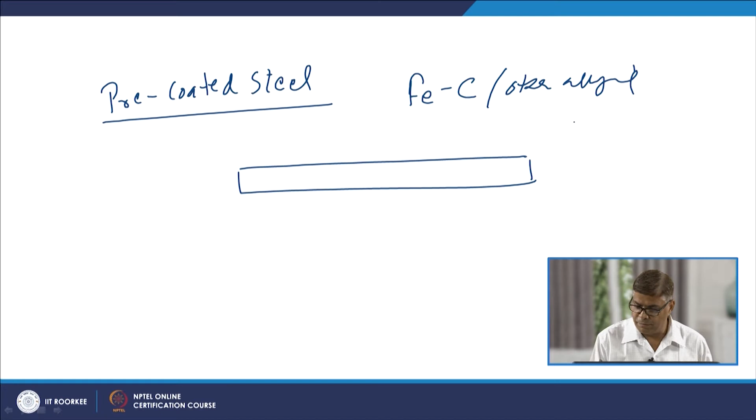Steel is an alloy of iron and carbon with the presence of other alloying elements. These steels are not very good with regard to resistance to environmental exposure in the form of oxidation and corrosion. Except the stainless steels, most steels have primarily iron, carbon and other alloying elements for strengthening purposes. Such steels do not offer very good resistance to oxidation and corrosion.

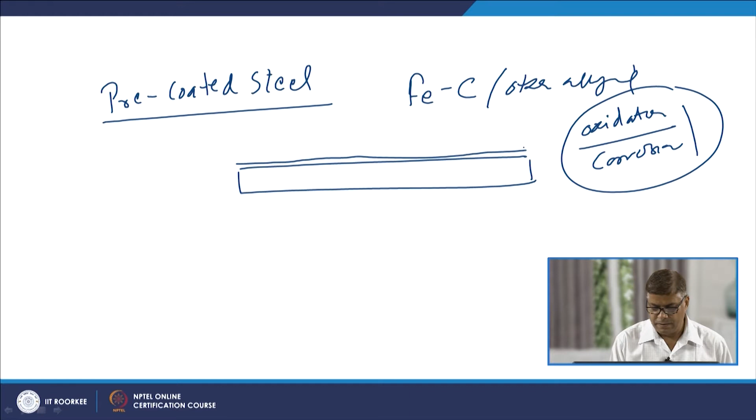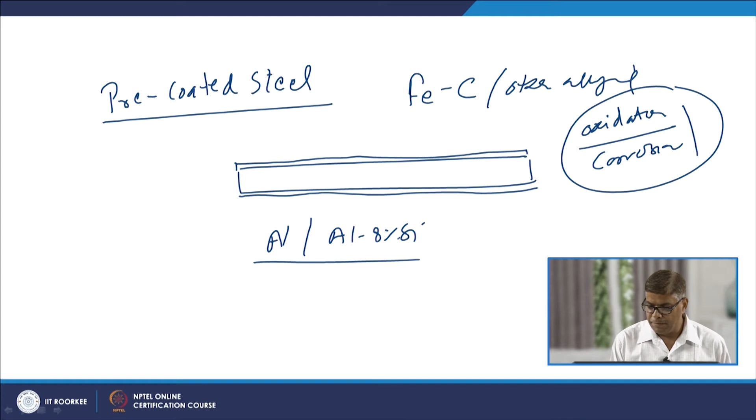Therefore, in order to improve their resistance to oxidation and corrosion, the steels are frequently coated with metals which can offer such resistance. When a coating of either pure aluminum or aluminum 8% silicon alloy is made on the steel, it is called aluminized steel. On the other hand, we can also do the coating of zinc. When zinc is coated onto the surface of the steel, it is called galvanized steel.

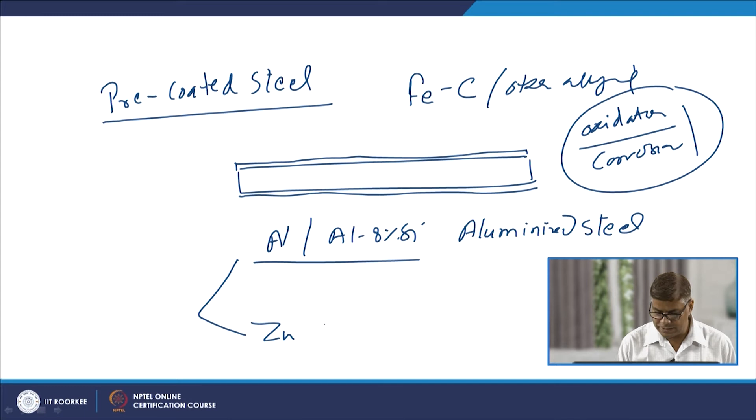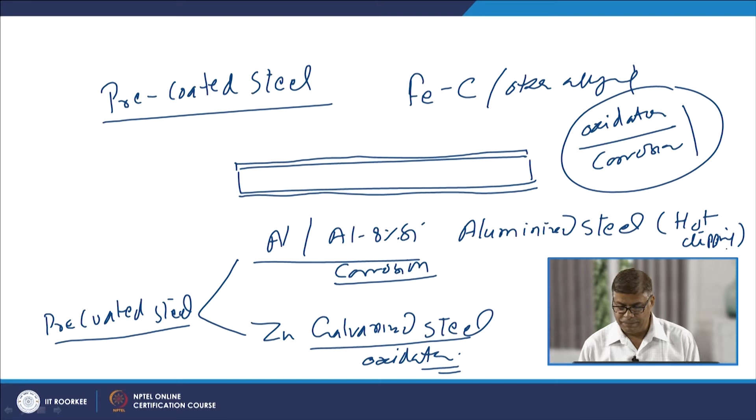So, the aluminized steels offer very good resistance to corrosion, while resistance to oxidation is offered by the galvanized steel. These are the two broad categories of pre-coated steels. There are different methods of applying these coatings, but the most commonly used method is hot dipping. The plate, sheet or component to be coated is dipped in the molten bath of aluminum or zinc and then taken out to develop the coating.

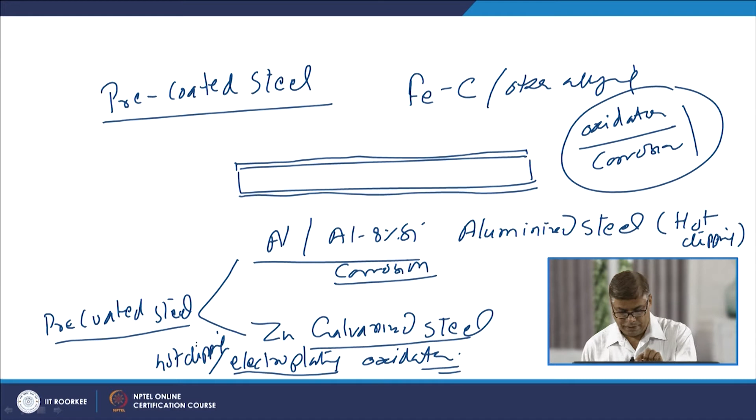Another method is electroplating. Electroplating and hot dipping are both used for developing galvanized steel, or applying the coating of zinc onto the surface of steel. When these steels are welded, like this is one component and this is another component, say these are coated steels, the surface will have a coating of either aluminum or zinc.

For welding, when the faying surfaces of such steel sheets are fused, the zinc and aluminum will also be heated and brought to the molten state. When the melting of aluminum and zinc takes place, this interferes with the welding in different ways. This interference due to heating and the molten state leads to a reduction in the weldability of these steels.

So, in general if we compare carbon steel with and without coating, the coated steels will have somewhat lower weldability than the uncoated or bare carbon steel sheet. So, what are the ways by which the aluminum or zinc coating can interfere in welding so as to reduce weldability? These are three different ways.

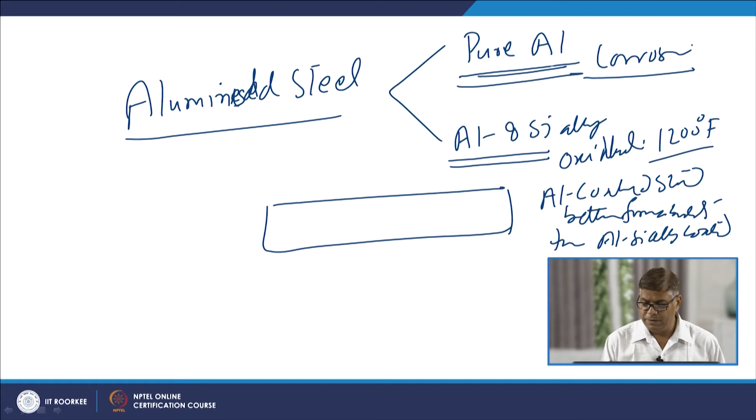So, the high temperature oxidation resistance is improved, but if we compare the steel sheets coated with pure aluminum and the aluminum silicon alloy, the aluminum coated steels show better formability than the aluminum silicon alloy coated steels. So, this is one comparison as far as pure aluminum and aluminum silicon alloy coated steel is concerned.

Now, aluminized steels can be welded using the resistance welding processes, like spot welding or seam welding. As far as the weldability of the coated steel by resistance welding is concerned, it is similar to that of bare low carbon steels. The coated steels offer similar weldability, but there are some issues. To understand those issues, we need to understand a little bit about the resistance welding process.

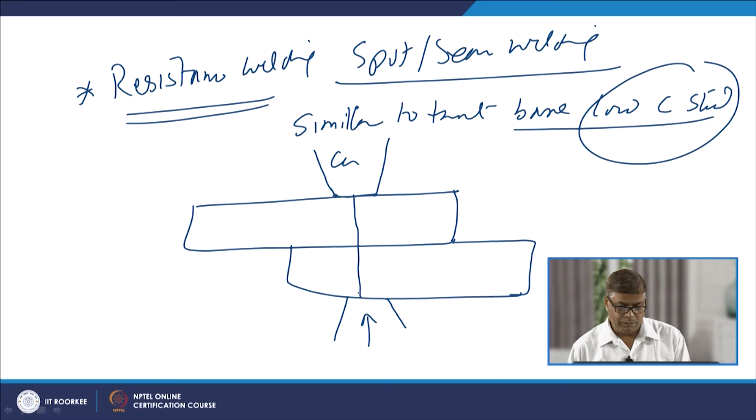In the resistance welding process, water cooled copper electrodes are brought in contact with the surface and used to apply pressure, and once the sheets to be joined are in contact, the current is allowed to flow from one side to another. This current generates heat by the I square R T principle. Since the contact resistance is maximum at the interface, maximum heat is generated there, leading to softening and partial melting of the sheets to develop the nugget and ensure metallurgical continuity between the parts to be joined.

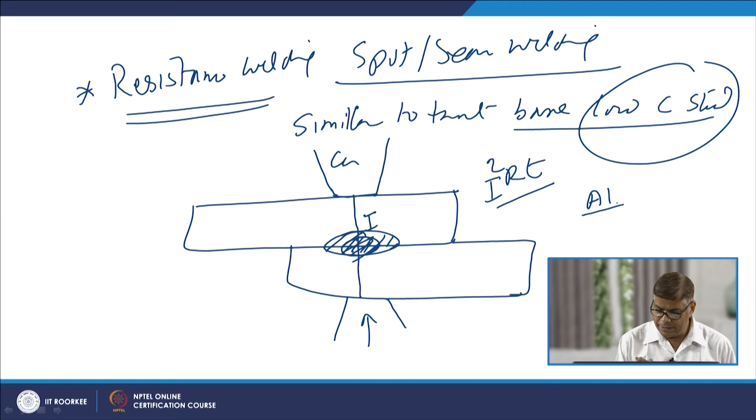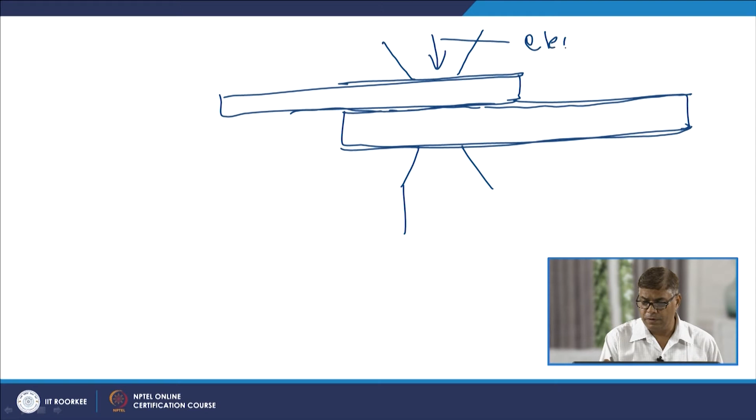Now, coming to the aluminized steels, the aluminum coating is there on both sides. Say this is a sheet coated with a thin layer of aluminum on both sides, and likewise another sheet is also coated with aluminum. So, this thin layer of aluminum will be at the interface, and both sides will have electrodes used to apply the electrode force. Then the current will flow across the sheets to be joined, generating heat through the I square R T principle.

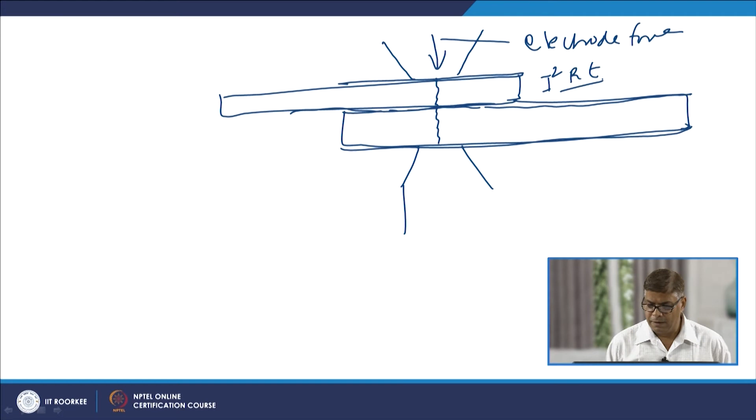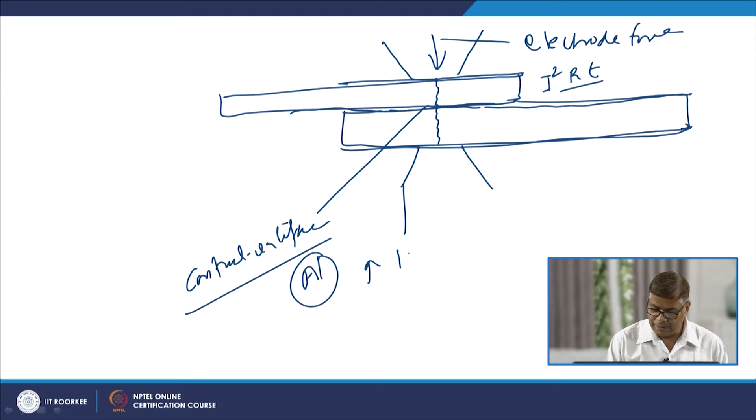But in this case, at the contact interface on both sides we have aluminum, which has higher thermal conductivity and high electrical conductivity, which means electrical resistance is low. So if we compare with bare sheets with no aluminum coating, in aluminized steels the R value at the interface will be low, and that is why under identical current and time values, the heat generated will be lower because of the lower resistance.

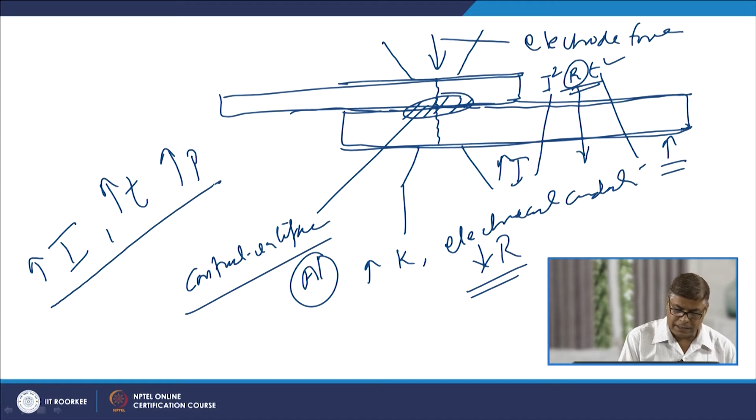Therefore, in order to generate sufficient heat at the interface for the softening and partial melting required to form the nugget, to counter the reduction in R, we need to increase the current and the weld time. So, in general, the welding current, the time for which current flows, and the electrode pressure used to hold the sheets together are all increased, so that the required heat for softening and partial melting can be facilitated.

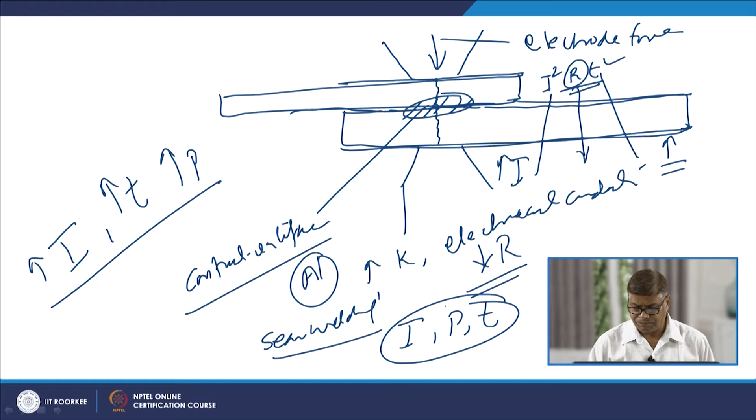Likewise, in the seam welding of aluminized steels, the current, the pressure, and the time for which current is allowed to flow are all increased, so that the required heat can be generated to produce sufficient nugget size as well as thermal softening of the metal.

Coming to the arc welding of the aluminized steels.

Arc welding of the aluminized steels may be carried out using the shielded metal arc welding process. It can also be carried out using the gas metal arc welding process or the gas tungsten arc welding process. At the same time, things can also be joined using the soldering processes.

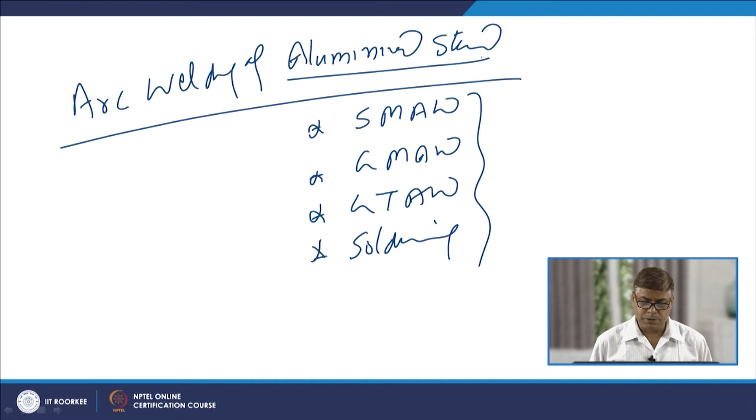But the kind of issues related with these processes when the aluminized steel is welded are different. So, we will be talking one by one about each of these processes when they are used for welding of the aluminized steels.

When the shielded metal arc welding process is used, we know that the protection of the weld pool from the atmospheric gases is very less. The protection of the molten pool in case of the SMAW process is poor, because whatever inactive gases are produced, they are produced through the thermal decomposition of the coatings available in the flux, and they provide a loose shroud of inactive protecting gases around the arc as well as the molten pool, and therefore protection is poor.

So, in order to provide effective protection, basic coated electrodes are used for the welding of the aluminized steels by the SMAW process. But the effectiveness of the shielding of the weld metal from atmospheric gases like oxygen and nitrogen is very poor.

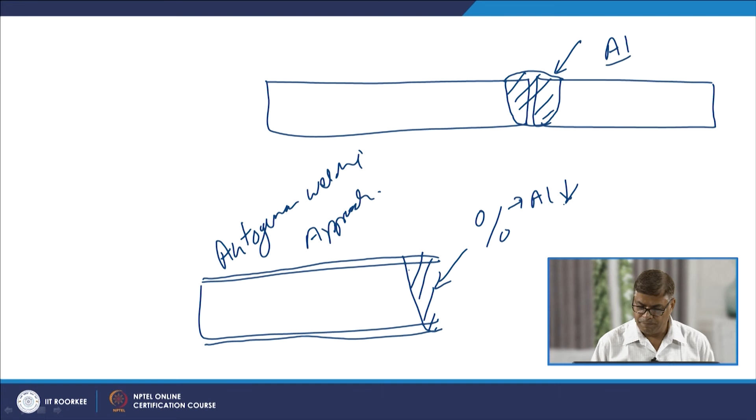Now, we need to see one very simple thing. Aluminum coating of a particular thickness is being used, and when we melt a portion, the aluminum will be going into the weld metal. When we use a thick sheet, the percentage of aluminum in the weld metal is low as compared to the case when an aluminum coated thin sheet is welded, where the proportion of aluminum going into the weld metal is much more.

So, when thin aluminized steel sheets are welded, in general the aluminum concentration in the weld metal is high as compared to the case when aluminized steel sheets of greater thicknesses are welded by an autogenous welding process. Then the aluminum concentration in the weld metal is less.

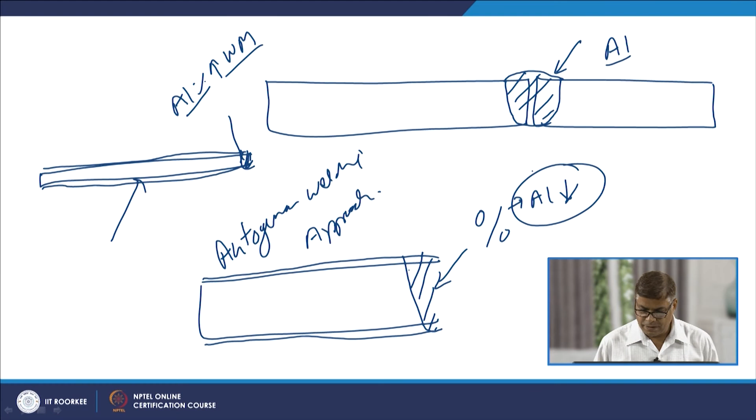With a higher concentration of aluminum, greater than 1% in the weld metal, since aluminum does not dissolve in the iron, it forms brittle iron-aluminum intermetallic compounds. The formation of these brittle intermetallic compounds reduces the ductility, the strength, and the formability of the welded sheets. So, we need to look into how much aluminum is getting into the weld metal, especially in the case of autogenous welds.

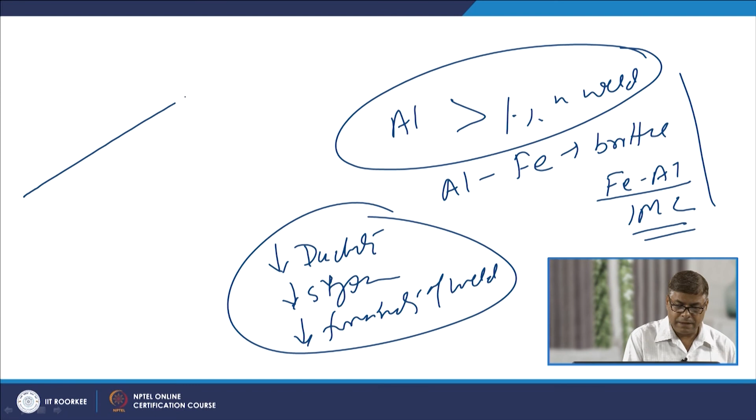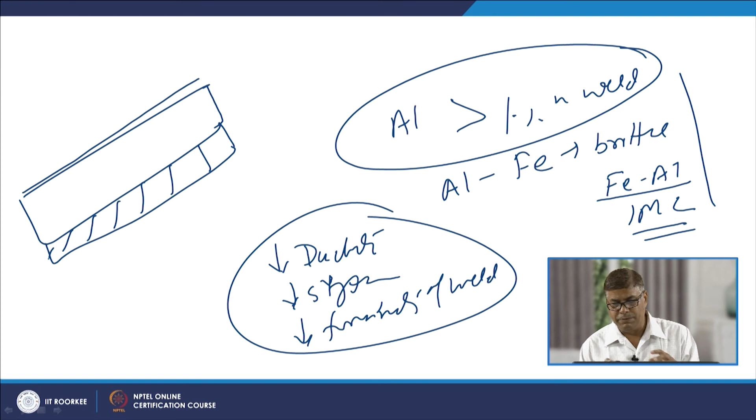So, the greater the thickness of the sheet, the lesser will be the weight percentage of aluminum in the weld metal. On the other hand, if the coating thickness is more, a greater thickness of aluminum coating will lead to a greater percentage of aluminum in the weld metal, and that will be more troublesome as far as the reduction in ductility and formability is concerned.

When we talk of the GMAW process, it is very different as compared to the GTAW process, where the filler in the form of an electrode develops the arc and generates the heat. At the same time the electrode also melts and gets transferred into the weld metal. The advantage is that whatever aluminum comes from the base metal due to fusion will be diluted by the electrode material consumed during welding. As a result, the weld metal composition is modified by the electrode.

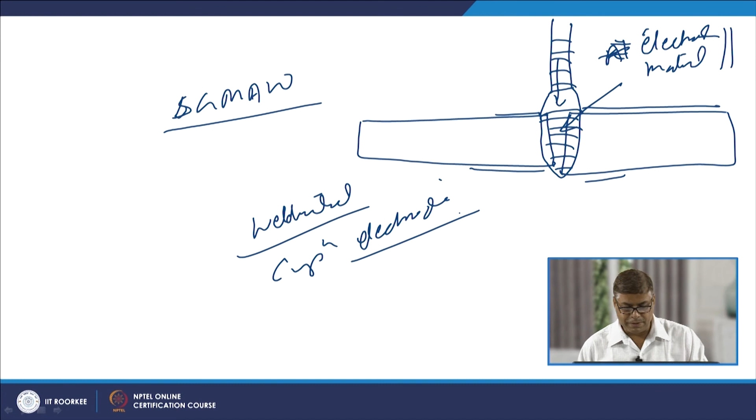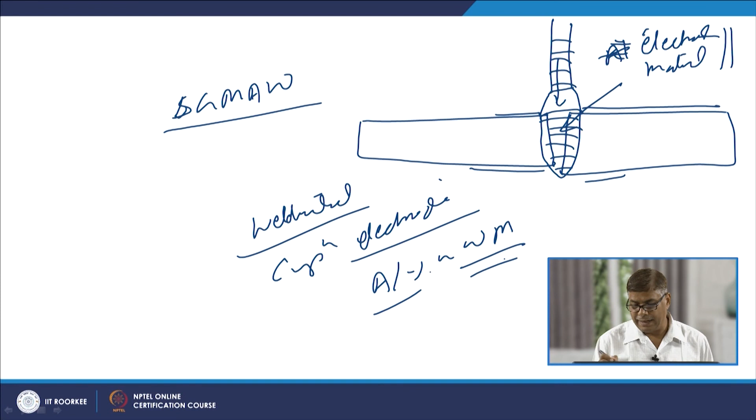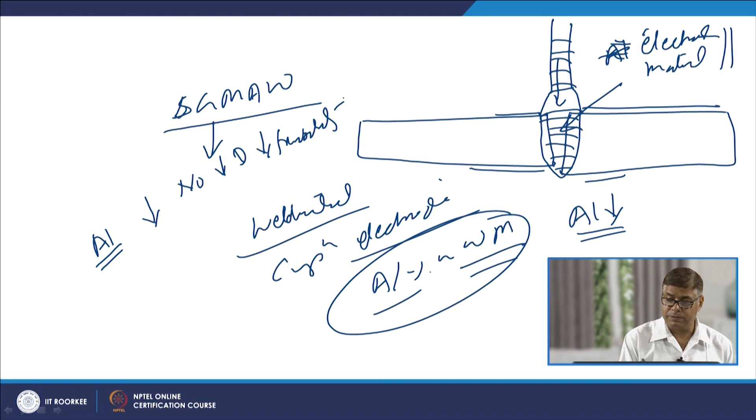Whatever metal comes from the electrode will dilute the aluminum percentage in the weld metal. This dilution reduces the concentration of aluminum in the weld metal, and therefore, in the GMAW process, the problems associated with aluminum are reduced significantly. There is no problem of reduction in ductility or formability of aluminized steel weld joints prepared by the GMAW process.

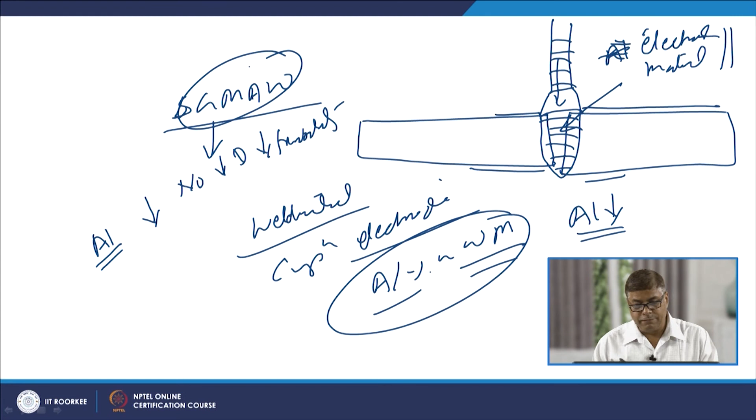But the effectiveness of the shielding in the GMAW process is not as good as that of GTAW. If we lose the protection of the weld metal from atmospheric gases, it can lead to the formation of Al2O3. It may reduce the wetting of the molten metal and reduce the ductility and formability of the weld joint. So, effective protection of the weld metal from atmospheric gases is needed to avoid these adverse effects.

Apart from this, in the GMAW process, when using argon as a shielding gas, we frequently add oxygen and carbon dioxide, maybe 20 to 30%, so that the arc stability is improved, and that in turn helps provide effective protection to the weld metal.

Now, coming to the joining of aluminized steels by soldering. Wherever the aluminum coating is there, it forms oxide in the form of alumina. To take care of the alumina and aluminum coating, we use mechanical and chemical cleaning, thereafter dipping of the aluminized steel in 5% trisodium phosphate solution, then rinsing in water and drying of the sheet, and after this the sheets are joined by soldering.